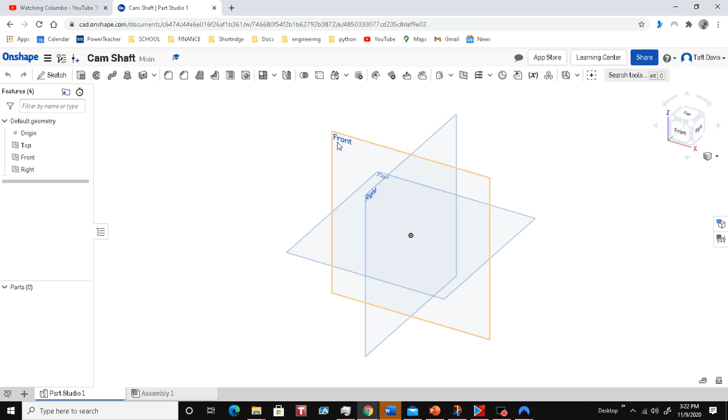Alright, I'm going to work on the front plane. It doesn't really matter which one we use, but this way, when we import it to our box, it's going to be facing in the right direction, and it'll make the mate a little bit easier. So I'm going to click on the front, click Sketch, and I'm going to turn these off. They're just a distraction to me. I'm going to click on Front.

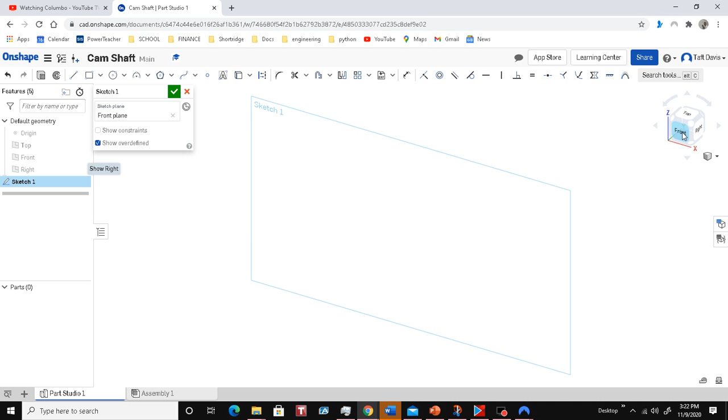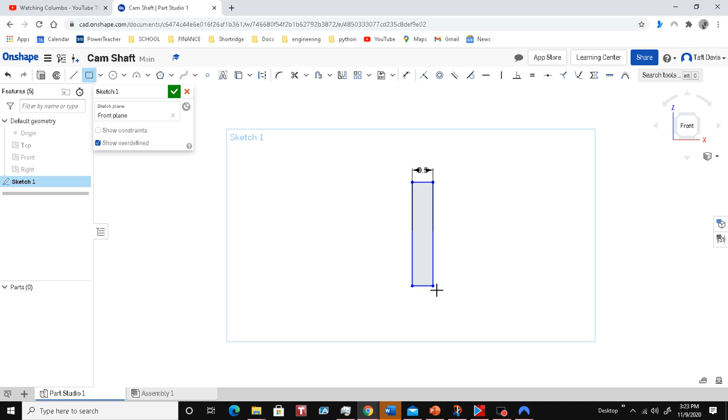I'm going to come up here on the left side, click on Rectangle. Doesn't matter if we use corner rectangle or center. I'm going to left click and drag. When I release, I want to make this 1/2 inch wide and 2 inches tall. And I want to extrude it 1/2 inch. It defaults to 1. So I'm going to put in 0.5.

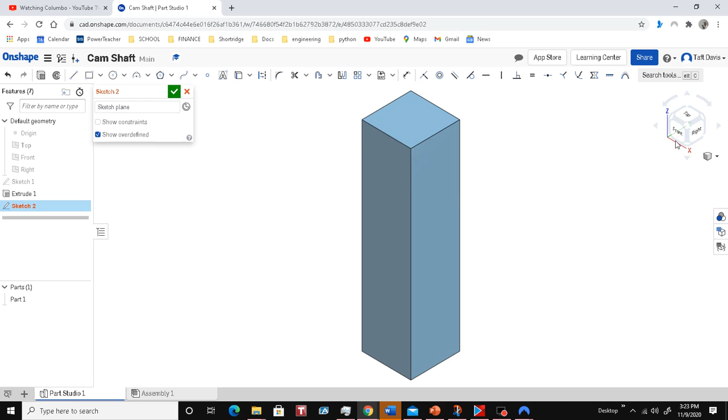Alright, so click on isometric. That gives us this nice box right here. Now we're going to have a 6-inch shaft coming off the bottom of the box. So I'm going to click Sketch, click Front. And I'm going to come up here and click on the front of the cube just so it gives me this nice rectangle here.

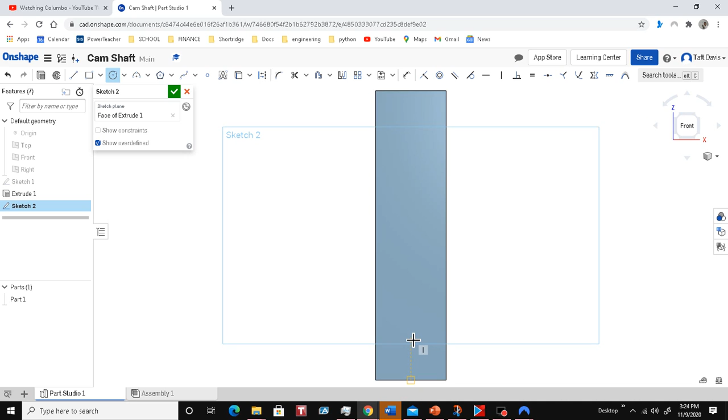I'm going to click on the circle. Now I want it to be centered. If I come down on this line and slide over, when I get that little square right there, if I come straight up, it gives me that dotted line. That lets me know that I'm centered at least left to right on the square. If I wanted to center it on this side, I could also come up, find the center and then slide over, and that'd be.

But I don't want it centered in the rectangle, so I'm just going to come down here, left click, drag out. Now I want this 3/8, so I'm just going to do 3 divided by 8, enter. Well, let's try again. 3 divided by 8. Alright.

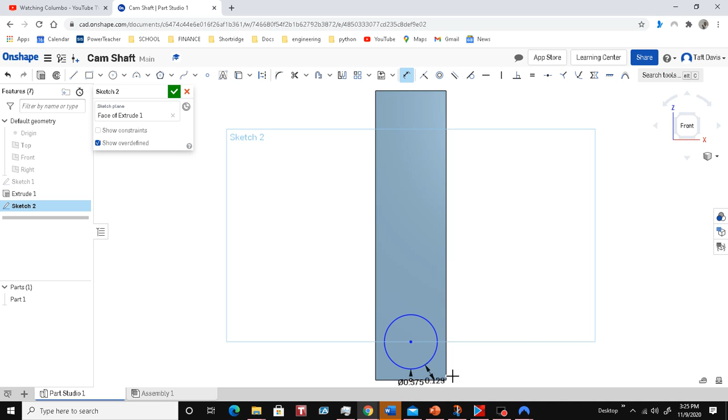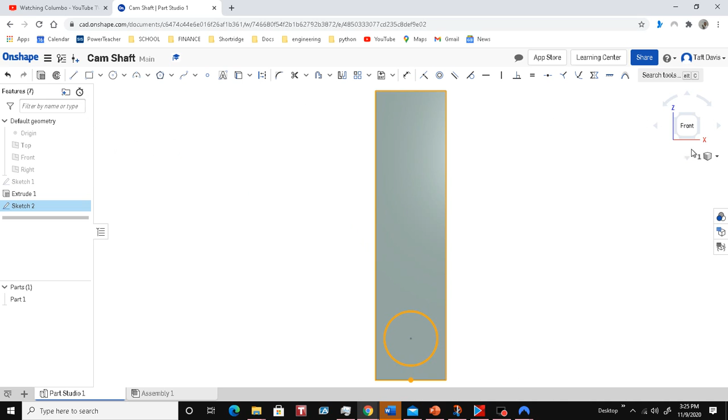Now I'm going to come up to the dimension. I'm going to click on the outside edge of my circle, then the bottom edge of my rectangle. And I'm just going to make that 0.125 inch. Okay, so now I'm going to extrude. I'm going to click on isometric so we can see the extrusion there. Again, it defaults to 1 inch. I want this to be 6 inches. Alright.

So that finishes that part. Now I need to put the little handle on the back so that we've got something to grab onto when we turn it. So I can use the arrows on my keyboard, or the arrows up here, and just kind of turn it around so I can see the back. I'll click Sketch, click on the back.

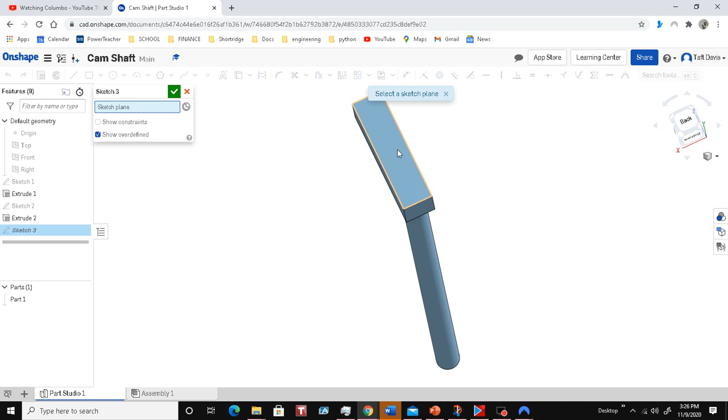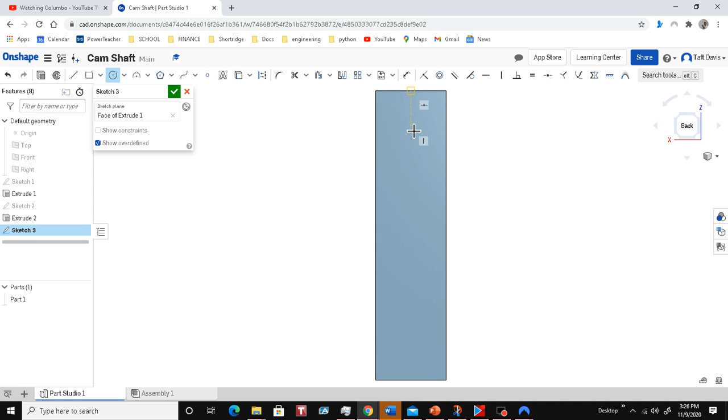I'm going to click on the back there. Now I'm going to do the same thing on the back side at the top that I did on the front. So I'm going to click on my circle, slide over here, find the center, come down. I'm going to do 3 divided by 8.

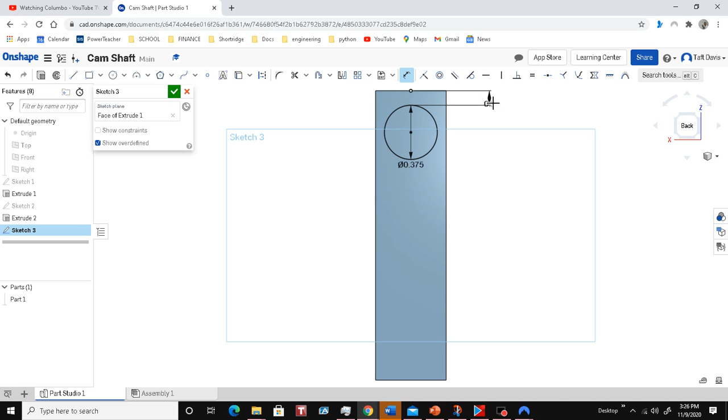Now I'm going to dimension it again. Click on the edge of the circle, the edge of my rectangle, and make that 0.1 inch. I'm going to click on extrude. It defaults to 1 inch. That's what I want. Alright, so I've got my handle now.

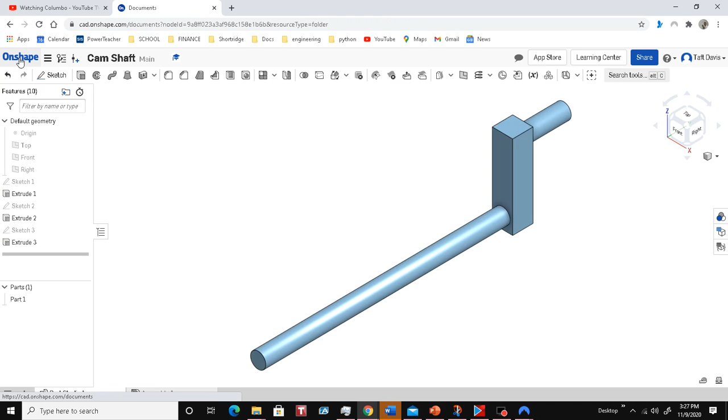I'm going to come back over here. I'm going to click on the onshape. It takes me back to the screen where I've got my box. And now I've got the camshaft there, and it takes it a minute to generate a preview, but that's alright. So now I'm going to double click on my box.

Now I want to insert the camshaft, so I'm going to click on insert. Now because this assembly was in the Part Studio where I built the box, I've got the pieces to my box right here, but I don't have the camshaft. So I'm going to click on Other Documents. Now I can click on Created by Me, that's going to show everything that I've done, or Recently Opened. So I'm going to click on Recently Opened because then that's just going to show me the newest one. Since I just did the camshaft, that's going to be at the very top. So I click on that.

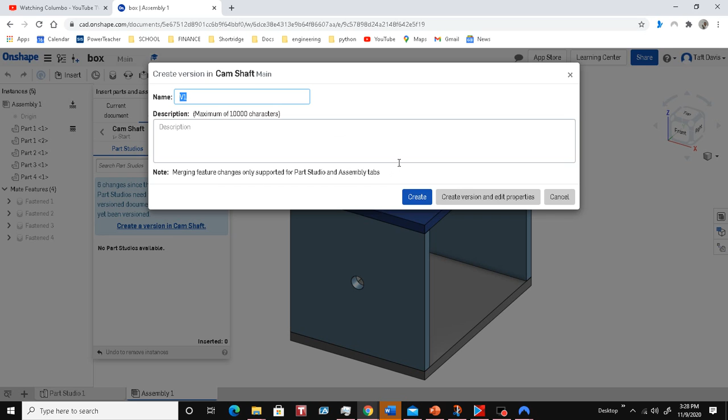Now it wants me to create a version in camshaft, which I'll do. This is V1, that's version 1. And so I'm going to create that version. Oops, what was that? Right, now the way that we move the part over, just like we did the parts of this, I just left click and release. You don't hold the button down. And I'm just going to kind of drag it over here beside the box. Click again, and it's there.

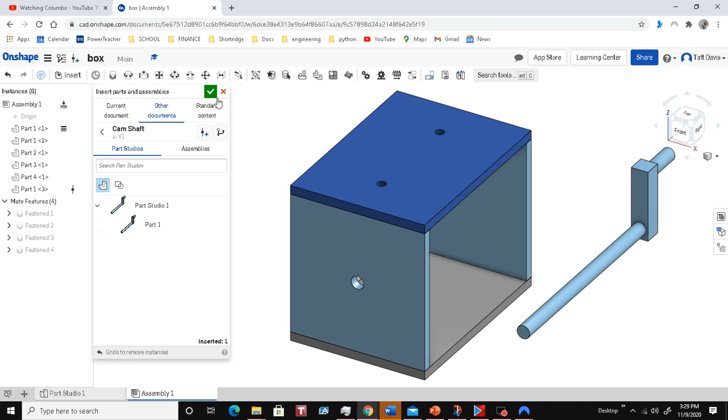Now this time I don't want to use the fasten mate, I want to use the revolute mate. Okay, so it's up here kind of at the top. It's got little arrows kind of going around it. If I put my mouse over it, it says revolute mate. So I'm going to click on that.

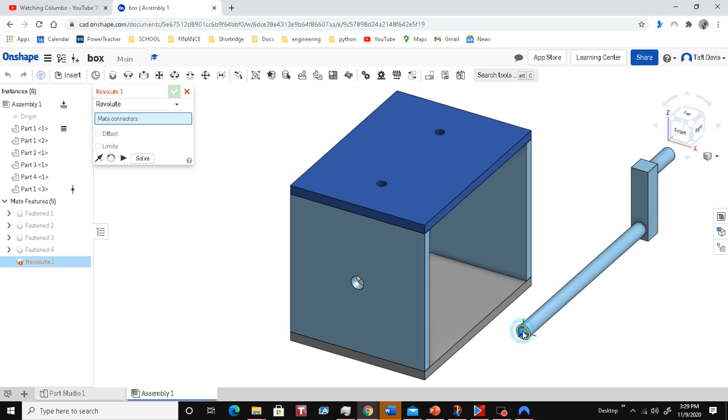Now I want the end of my camshaft to be flush with the outside edge of this plane. So I'm just going to come over here. I'm going to click on that center point at the end of the camshaft. Come over here, click on the center point. And it lines up. So if I rotate this around, let's bring down a little bit. Oops, a little bit too far.

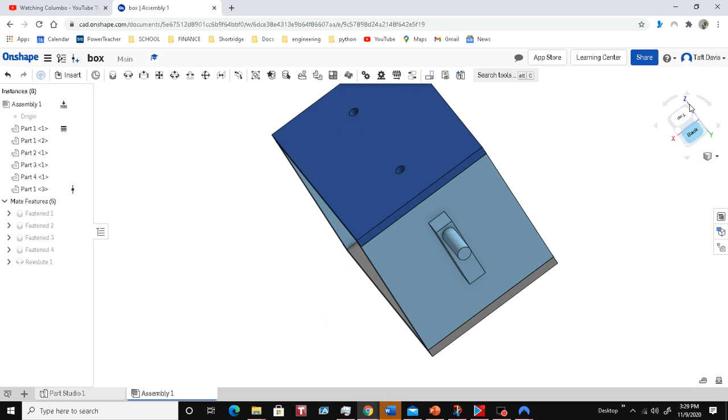So now if I grab this, and my computer's running a little bit slow, but anyway, you can see that my handle moves. Okay, and so that's what we're looking for. We want to make sure that when we get this put in there, that our handle's able to move. If it doesn't move, it may be because you did a fasten mate instead of revolve mate. So you just back it up and redo it with revolve mate.